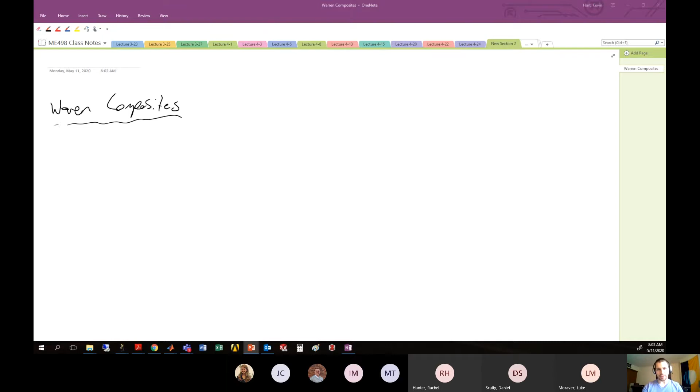I particularly like the first slide of the slide deck this go around - it's got some cool pictures and introduces the topic in a general sense. I'm going to pull one picture in here and talk about this quickly, to give a baseline for what I mean by woven composites. Most of what we've talked about in this class has been unidirectional composites. Woven composites are those where the fabric before impregnation is arranged in some pattern that's not a unidirectional pattern.

This picture tells a pretty good story about what would be a three-dimensionally woven composite system. This blue is a tow - thousands and thousands of individual fibers - woven in a wave fashion between straight warp and weft tows. So you've got some tows going this direction and some going this other direction. These are warp and weft tows, and we'll talk about that in a minute. So here's what I'd consider a fabric unit cell of a three-dimensionally woven fabric.

From this you can make a composite. If you're looking at it from the top without any load on it, you might see something like this - where now you start to see some of these things, like this blue Z-tow, the through-thickness tow. You can see it in the composite after manufacturing. This is a view from the top - you can see that Z-tow going over two of the tows running in the parallel direction. In this horizontal direction, you can see these Z-tows from above.

Now, what happens when you load something like that is some crazy stuff and crazy damage that might occur. For this reason, 3D woven composites are a little suspect, because they have this Z-tow which can really muck things up. If you end up loading this guy this way, you see all this cracking occur - it's just really horrible. We've talked about what happens when you load a unidirectional composite in the 90-degree orientation. That's kind of like what's happening here.

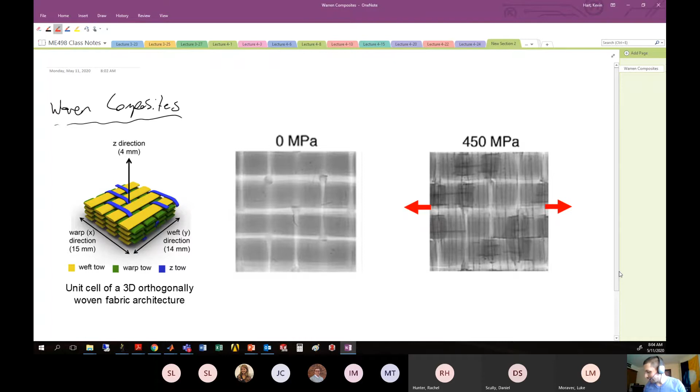And so you see all these cracks that form, and it's really nasty looking stuff. And you can also load it the other way and you'll get cracks that form the other way.

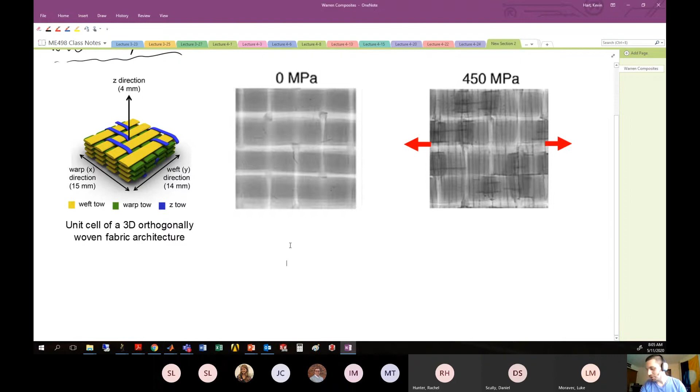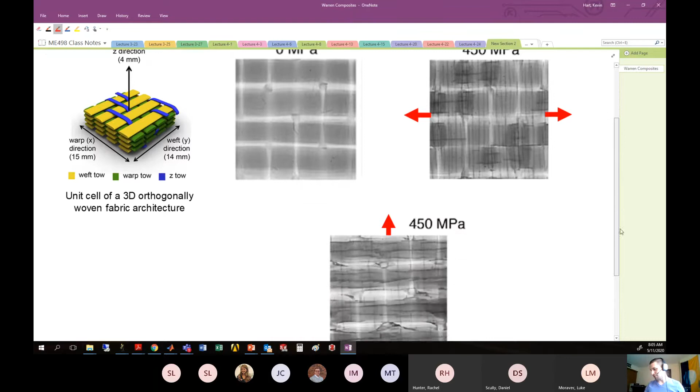So generally you can see that woven composites have very good fracture resistance because they have this through-thickness tow coming through, but their in-plane properties are not the best. This is what happens if we load the other direction, along the same direction as these Z tows, these woven through-thickness tows. Either way, you get some extreme damage, some crazy transverse cracking that causes ultimate failure, and some loss of in-plane properties with these woven structures, but generally you gain a lot of fracture toughness benefit.

Okay, so that's our little introduction. There are some nice cool pictures that I wanted to show. All right, so let's dive in and get a little more technical definition, and let's get our vocabulary going.

All right, so here we go with fabric architectures. I would say that woven composites are composites that are made from fabric architectures that were not one-dimensional. So let's talk quickly about these fabric architectures.

Fabric architectures are commonly categorized by dimensionality of fiber travel. So you'll see 1D, 2D, or 3D.

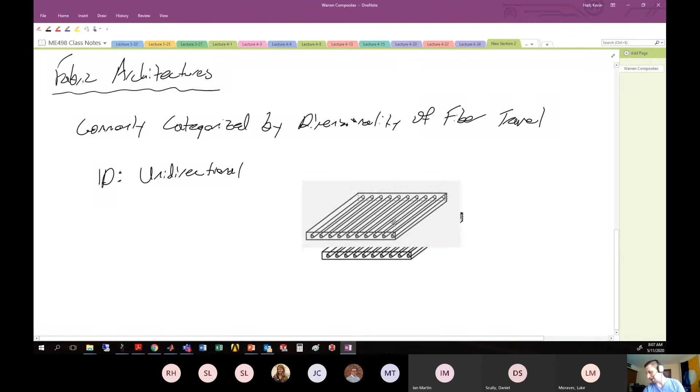Obviously, a 1D composite is made from unidirectional fabric, and this is basically what we've talked about the entire time in this class. It's how we construct laminated composites, and it's what our analysis has mostly been on. So here's your unidirectional composite, where you've got fibers all running just in one dimension. It's one dimension that these fibers travel in.

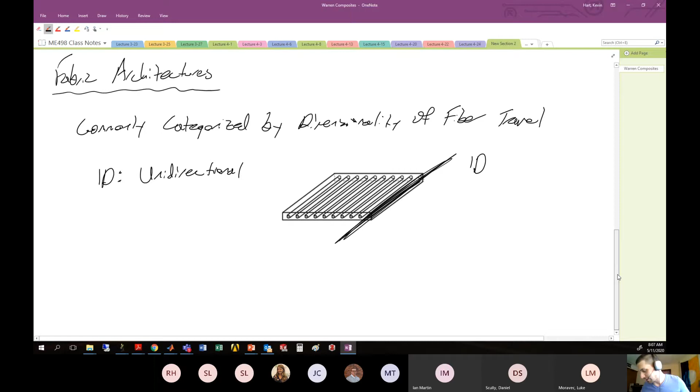If you make just a unidirectional composite, it would not be considered a woven composite, even if you stacked a bunch of unidirectional layers on top of each other, because it's not made with architectures that are higher than one-dimensional. So these are your 1D unidirectional architectures.

Your 2D architectures are those that have fibers moving in more than one direction, so usually it's like an in-plane fabric. And so some names that you might see here.

Looks like I have a question. Do I have a question? A plus plus plus plus. Okay, that's Justin. That must be in response to my meme. Or maybe he just really likes my pictures.

I don't know, unclear. All right, 2D composites. You are probably most familiar with a plain weave or a satin weave or a twill weave, which is a specific type of two-dimensional fabric, but there are other types.

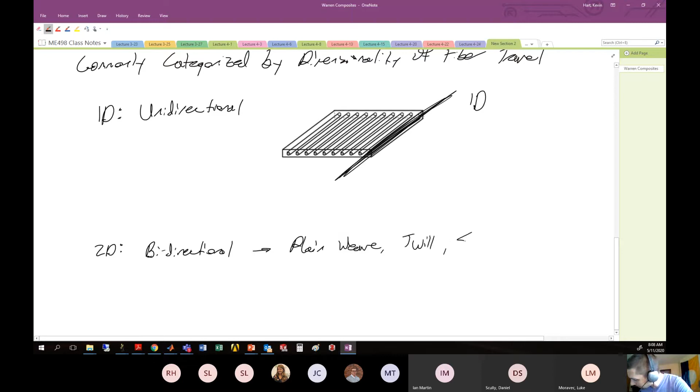So we would generally classify those types of weaves as bidirectional weaves, like your plain weave, twill weave, satin weave, etc. All right, so those bidirectional weaves are things that you've sort of seen in the past.

I introduced those in 429, and we talk about those in 429. I think I had you identify them on an exam. So those things you know.

There are other types of 2D fabrics, like knitted fabrics. Think of clothing manufacture. Like this clothing that I have, it was made in some way on some loom.

All right, so is this a plain weave? Is this a twill weave? Is this a knitted fabric? Is this a stitched fabric? Okay, these are the things that make up the backbones of what could be two-dimensional composites.

All right, knitted fabrics, there's braided fabrics, and you can also have continuous strand mats. Continuous strand mats are just where you have a bunch of fibers and you lay them down in a mat, and they're all randomly oriented in a plane.

Now let's get a picture in here and show what these guys look like. So most of these you have seen before, but maybe some of these you have not. So the pictures here will be helpful.

Pictures worth exactly 1,000 words. Exactly, I counted. Why did it go way down there? What the hell? Technology sometimes, you know.

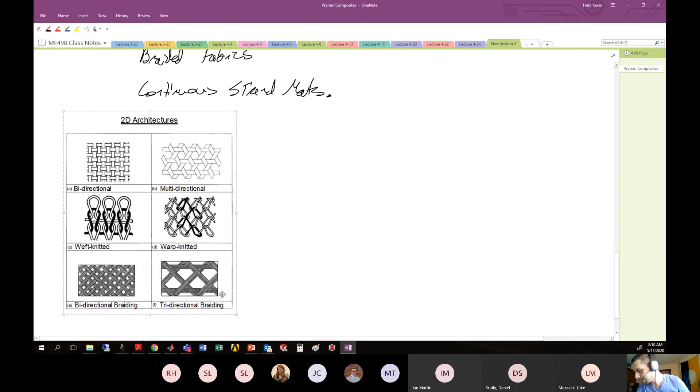Okay, so here are some of your 2D architectures. As I mentioned, there's this bi-directional weave, which looks like this. Here's an example of a plain weave bi-directional. You can have multi-directional, though this is very uncommon because it's actually difficult to manufacture something like that.

You can have weft knitted, so we'll talk about weft and warp in just a second. But this sort of knitting structure, what is it, stitch and purl. Anyone doing any knitting out there?

Stitch to purl too. So you can do weft knitted, warp knitted. Braiding we'll talk about is useful for making cylindrical structures, and you can have bidirectional or tridirectional braiding. These are probably equivalently difficult, or easy, to manufacture, however you look at it.

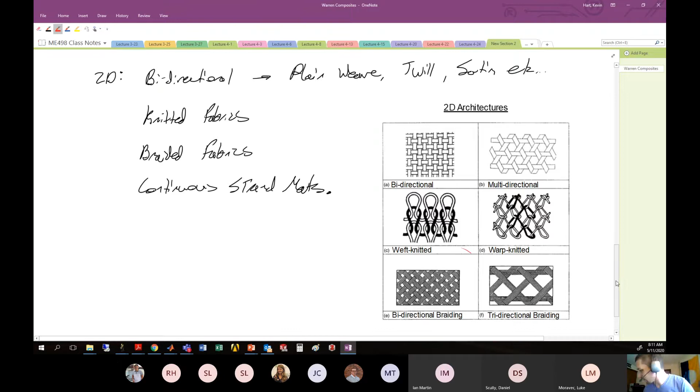So these are your types of two-dimensional fabrics, where the fibers are contained just in one plane. And then the next dimensionality up would be three-dimensional fabrics. 3D architectures can be made in a variety of different ways.

Back in the 70s, they were doing this Z-pinning and stitching that I mentioned before, and that's like a quasi-3D. So I put this here with quotation marks, but here I'll say stitched and pinned.

2D fabrics - I put this in quotation marks because if you just have a two-dimensional fabric and you put a bunch of stitches into it through the thickness dimension, is that really a 3D composite? You're kind of cheating. I guess you're incorporating fibers through the thickness, but it's not really part of the manufacturing process. So I don't like it much, but technically it is a three-dimensional woven structure because you do have a fiber going through the thickness. So technically yes, but it's like an asterisk. It's like it took steroids and it's trying to get into the Hall of Fame. It's cheating.

So stitched and pinned 2D fabrics, but much more on par would be like an orthogonal weave, or sometimes what's called a 3X weave. Those are very common types of three-dimensional woven structures. Let's take a look at what those might look like.

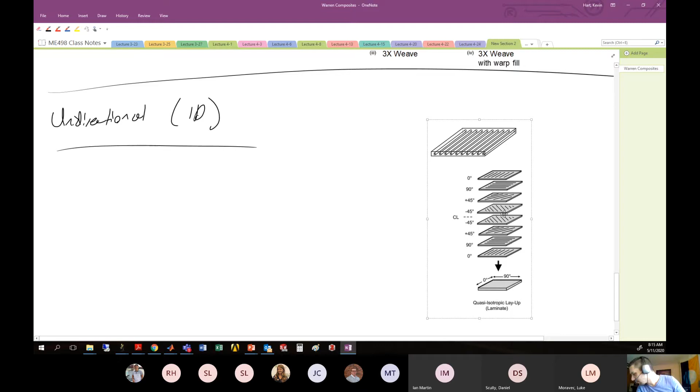Unidirectional, which is like 1D composites. So the general picture you should have in your head is, you want to make a laminate, you have one-dimensional composite, and the picture you should have in your head is something that looks like this, where you've got this unidirectional fabric, and it is feeding into these individual layers that make up what is like a laminate stack, and you can arrange them in a certain character so that you build them, build them, build them, to make the composite that you want. A cross section might look something like this after you've done this manufacture.

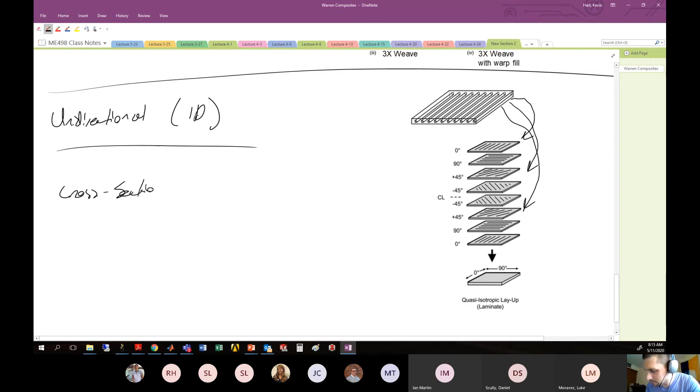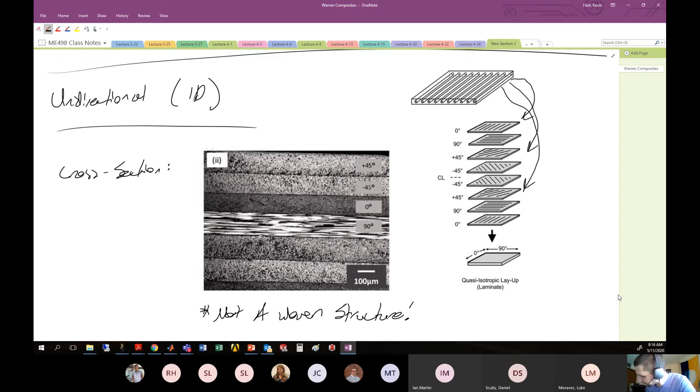This has voids in it, but don't mind the voids. The idea here is that you're stacking this up, and you have 0 degree, 45, minus 45, 90 degree layers, and you're making this laminate stack. Now, this is not a woven structure, because the layers are not interlocked with each other. So this is not a woven structure, and that's because there's no 2D interlocked architecture.

So there you go with unidirectional. We know that unidirectional materials are manufactured pretty straightforwardly. You get all these individual tows from a creel, they come together, and they're either going through solvent impregnation or the hot melt pre-pregging process, usually to make pre-preg. Otherwise, they can come in dry fabric, and the manufacturing there is pretty straightforward.

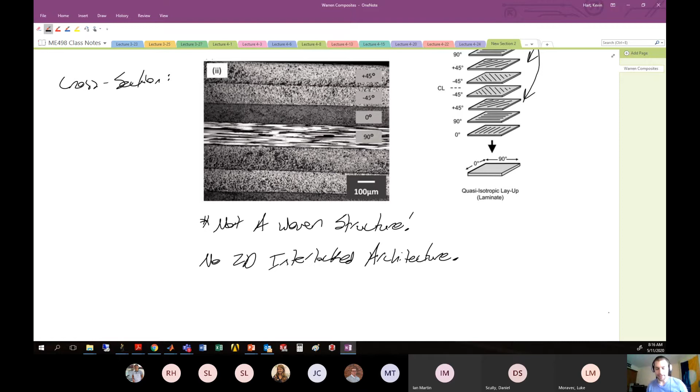I didn't feel the need to talk too much about the manufacturing here, but unidirectional fabric comes most often as pre-preg. So that's like 90% of the time it's coming as pre-preg. You can get unidirectional fabric in dry form, but it's not all that great, not all that common. You have to stack many layers on top of each other to get what you're trying to do. So most of the time, unidirectional fabrics are coming as pre-pregs.

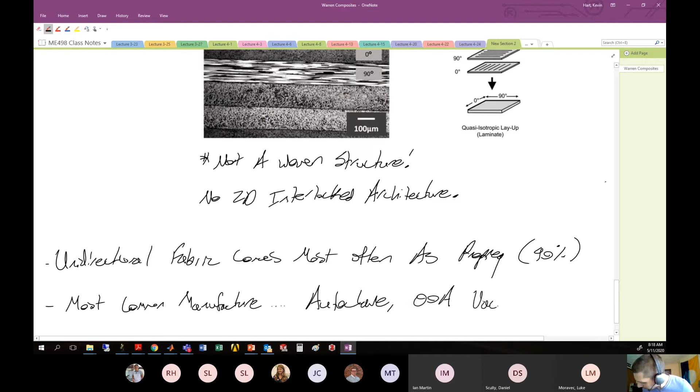And then the most common manufacturer of composites from those pre-pregs is autoclave, or out of autoclave vacuum bagging. There's that OOA again, I talked about that in 429. This is out of autoclave vacuum bagging. So if you don't have an autoclave, all you can do is put it inside of a bag and pull vacuum on it to do your best to try to squeeze everything down and get as much pressure as you can. So I'd say those are the most common manufacturing methods for the unidirectional or one directional fabric styles.

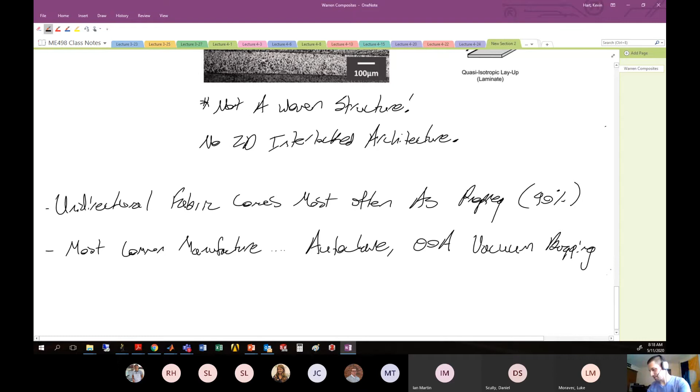I just want to bring in a data sheet here because let's look at what the data sheets actually look like for unidirectional composite, because we'll compare to 2D and 3D woven composites in just a second. So a data sheet - here, this is the same unidirectional material that I used when I created the laminate in day number 2, way back in February, I think that was.

God damn, that's a long time ago. Remember that way back when I made that composite? Yeah, this is the pre-preg that I used.

Okay, so a couple things I want to point out here. It tells you the amount of fibers in each tow - there's 12,000 fibers in each fabric tow. This is a carbon fiber pre-preg. Woven pattern here, we see non-woven, okay, because it's a unidirectional pattern, so that's of interest.

And here, this fabric areal weight - I've kind of alluded to this before, but I want to draw this out directly because I don't think I've made a very specific point about areal weight. The idea here is how much does one areal unit weigh? So if you've got a fabric that looks like this, and it's got 1 yard by 1 yard dimension, it has an area of 1 yard squared. So this fabric areal weight here is 4.3 ounces per square yard.

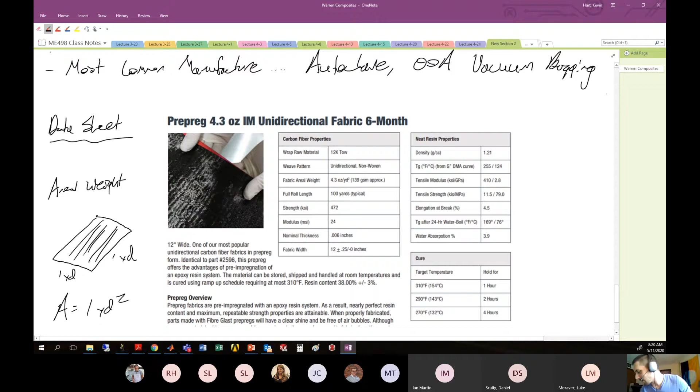Some other various pieces of information here - it tells you how to cure it. You get the idea, it's a data sheet. Tensile strength, tensile modulus, material properties - that's of the neat resin, by the way.

So there you go, that's all I'm going to say about one-dimensional fabrics. This is a lecture on 2D fabrics, so I'm trying to push through that 1D portion relatively quickly. We've talked a lot about one-dimensional fabrics, so how much do you really need to know? How much more can I possibly teach you? Well, there's a lot, but for now, let's move on from 1D and talk about 2D fabric architectures.

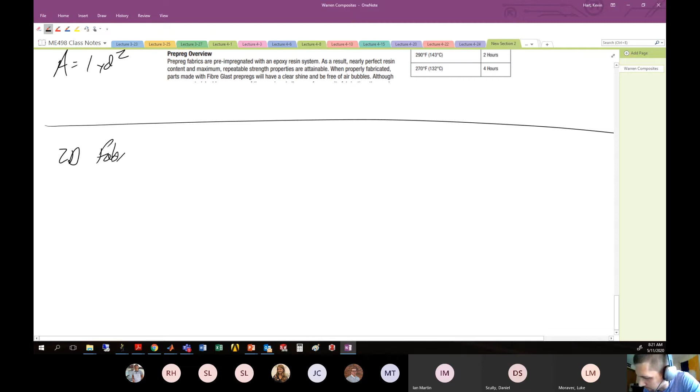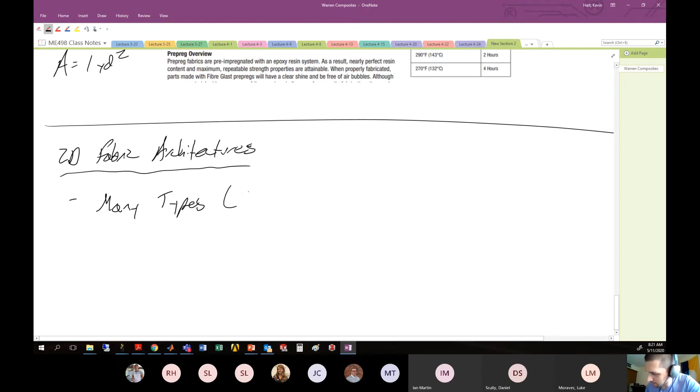And as I mentioned before, there are many types - there's the bi-directional weave, there's the knitted, there's stitched, etc. But bi-directional weave is by far the most common.

Gosh, spelling today. Like I say, it's bad today, but it's literally bad every day.

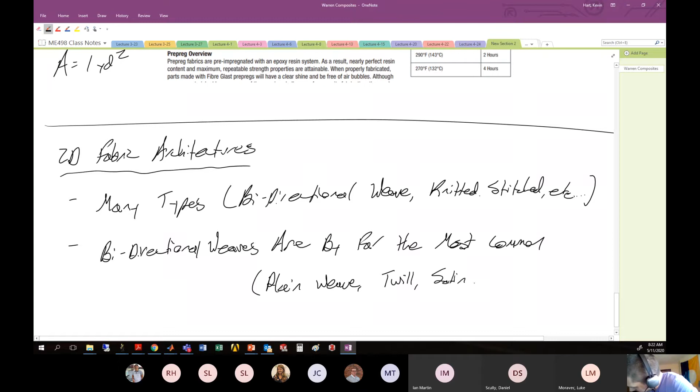Bi-directional weaves are by far the most common. Think things like plain weave, twill, satin, etc. These bi-directional weaves are by far the most common. If you're going to use a woven fabric in your life to manufacture something, 95% probability you'll be using one of these three types: plain weave, twill weave, or satin weave.

So let's take a minute, sitting right there, tell you how I became the Prince of Bel-Air. No, I'm just kidding. We're going to tell you how these bi-directional weaves are fabricated.

Let's make sure we have straight in our head what a two-dimensional fabric looks like, and what this bi-directional weave looks like. Here is a unit cell of a two-dimensional fabric. I showed the unit cell of a three-dimensional fabric, but here we need some nomenclature to make our way through the manufacturing process. Here's a plain weave fabric, two-dimensional unit cell.

What you see is this over, under behavior with alternating over, under. This plain weave is 1 over, 1 under, 1 over, 1 under. But now you see this nomenclature of weft and warp. Why do we use that terminology? What does that actually mean? Well, those two terms come from the actual manufacturing process of how this fabric was made.

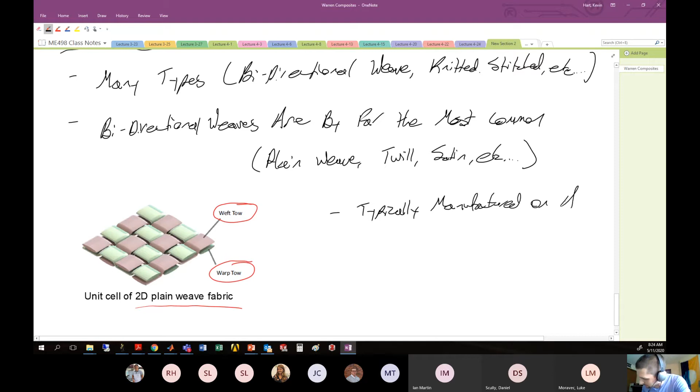These guys are typically manufactured on a loom, and by typically, I mean 99.999% of the time. Maybe you've got Grandma Hart stitching some 2D plain woven fabric in the background that's not on a loom, but, you know, very suspicious.

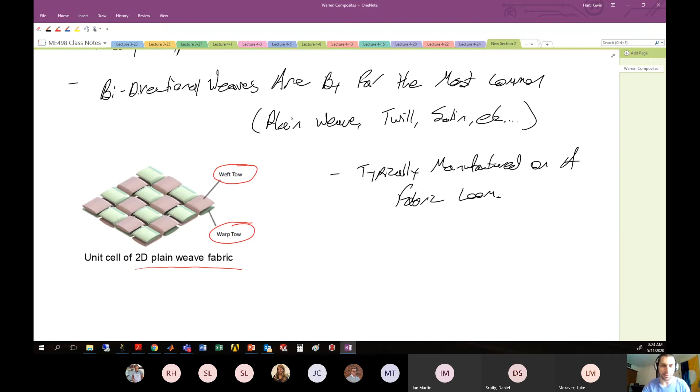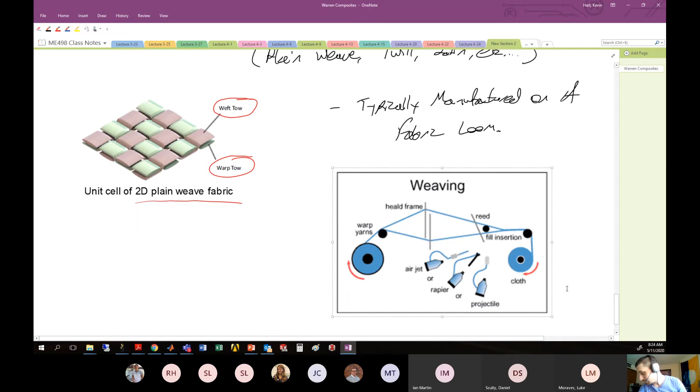Let's take a look at this weaving process and what it actually looks like. The manufacturing will look something like this. I'm going to show a YouTube video of this in a second, because I think the looms are an amazing feat of engineering. Very worthwhile to see a loom in action if you get a chance.

The idea here is that you have some mandrel with fibers, your individual fibers, and it's feeding into this loom. Many of these fibers are coming together, and they have this patterning where the fibers are coming into the machine and they're interlocked with each other. They're hooked up to what's called the heald frame, but I've heard it more often called the shute or the shed.

The idea is that these fibers are all moving into this shed and then being moved up and down. While it's being moved up and down in this fashion, another fabric tow is being pushed between this opening, shuttling back and forth. You see that opening being held by this shed.

What happens is it's opened in this various pattern and configuration, and inside of this opening a single thread is passed through, through one of three different methods: a projectile, a rapier, or an air jet. The most common is probably the rapier loom. Air jet looms are common as well, but you get the general idea.

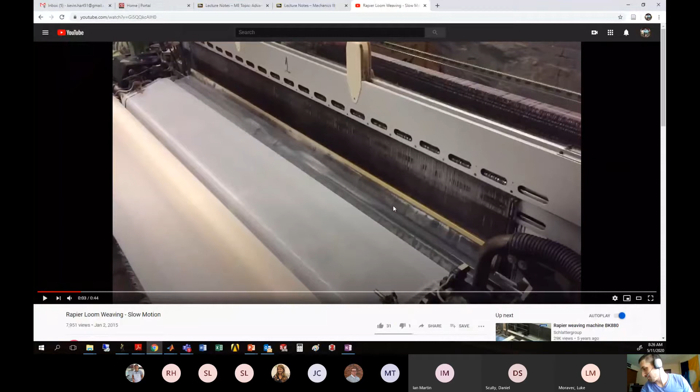Describing it is good, but I think a slow motion loom video is worthwhile here. So this is an awesome video, and I thought I would show it. This is a rapier loom in fabrication, making the fabric here. We see on the lower left the finished fabric coming off of the loom, and on the upper right, the shed.

It's going to do this thing where it moves up and down very quickly, and it will pass the fibers through. One thing I like about this video is it shows in slow motion the actual process of this weaving going on. You're not going to get sound with this.

I do have the link in the lecture notes if you want to actually hear the sound, but I'll give you the sound right now. That's the whole entire sound.

I'm going to play this for you and walk you through it. You can see the loom was just moving up and down very quickly, and now it's playing in slow motion. In slow motion, you can see the rapiers moving between the open layers of the fibers that are making up the backbone of the longitudinal direction.

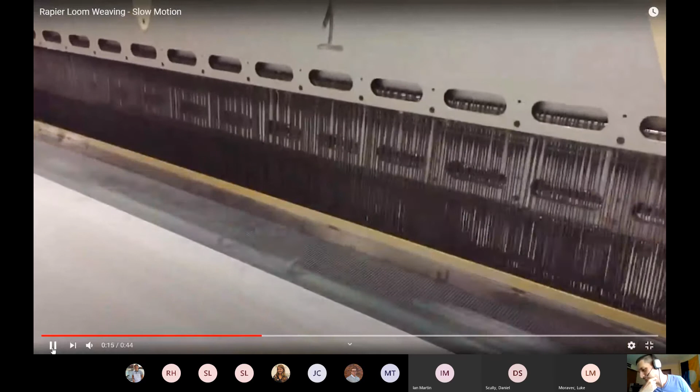All right, so again, there you see the rapiers coming in and moving the individual threads between the layers as they're sort of moving up and down. Now, what's going on here is each one of those black lines is connected to a fiber that's running in the longitudinal direction. So it's holding all these fibers, and it's causing this to shed up and down and pass the individual fibers between the opening and the shed as it goes in this up and down fashion.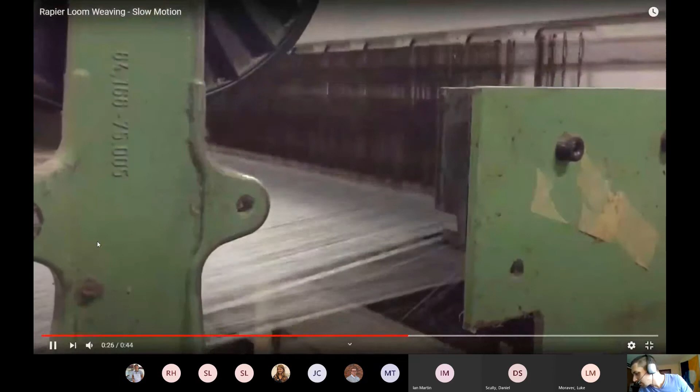Okay, so here we see the backside, and you see this triangular opening here where we're going to pass through that thread. You can see that the shed is opening all those individual layers, and that's where the rapier is passing through to pass those individual threads in the cross direction.

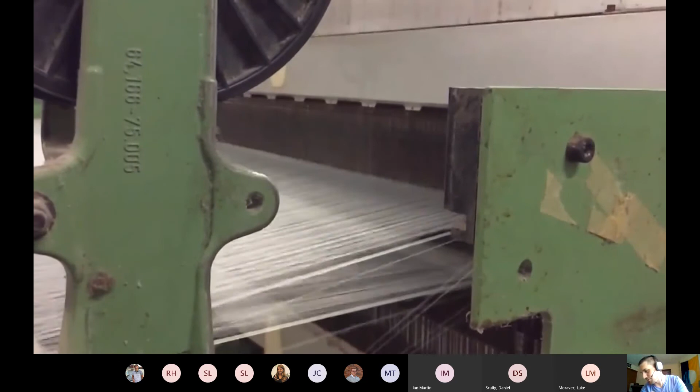So really awesome video, I like that video a lot. It shows you the rapier moving in slow motion, slowed down probably at least 10 times, maybe more like 20 or 30 times, to show the speed of that rapier. It is so fast - bang, bang, bang, bang, bang, bang, bang, bang, bang - passing those individual layers through.

Now, the reason I show this particular video is the fibers that are running in the direction that is being lifted constantly like this are called the warp fibers. That's like the 0 degree direction for the fabric. So here, continuous tows in the weaving process are the warp tows, and these are often called the 0 degree tows.

Now in a fabric architecture, a woven fabric, sometimes, like let's say you have a plain weave, it can be very difficult to identify what is the warp direction and what is the weft direction, because the warp and weft direction basically look the same in a plain weave. You have no idea which one is which. So you might have to have it specified, or if you have a roll of the fabric, you know that if you're unrolling it, which direction is warp and which direction is 90 degrees to that, which we call the weft direction.

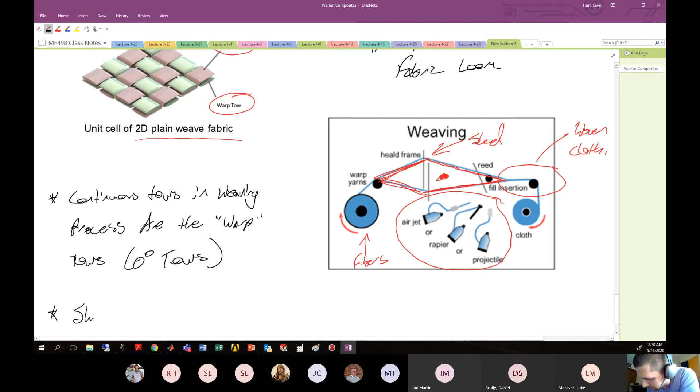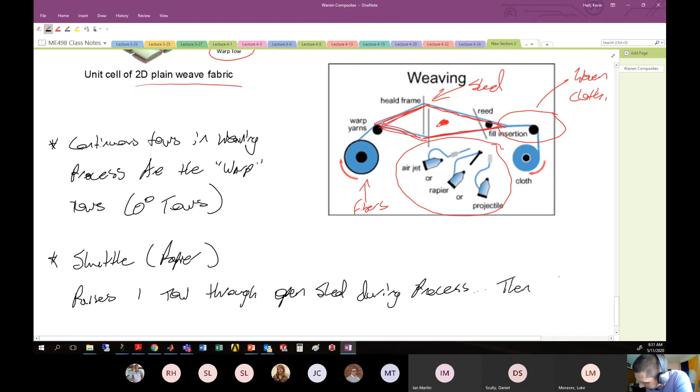Okay, so the shuttle, or the rapier, passes one tow through the open shed during the process, then repeats. That pass-through tow is the weft tow, or what is called the 90-degree direction.

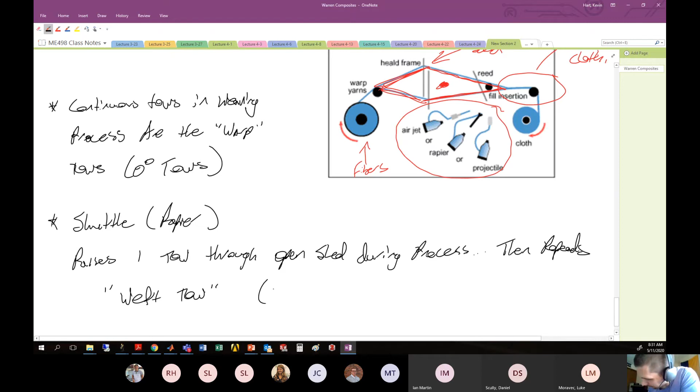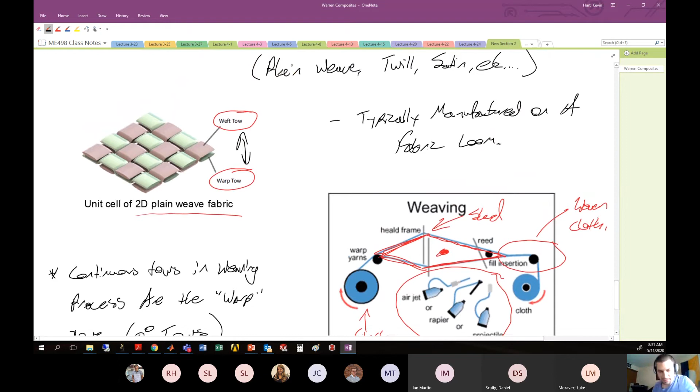Okay, so that's kind of how your loom works. So when you see this unit cell and people are talking about warp and weft tows, or warp and weft directions, that's what they're referring to - the way the fabric was manufactured on the loom, and which fibers were in the warp direction, which is this continuous direction, and which ones were passed through the rapier, which is the weft direction.

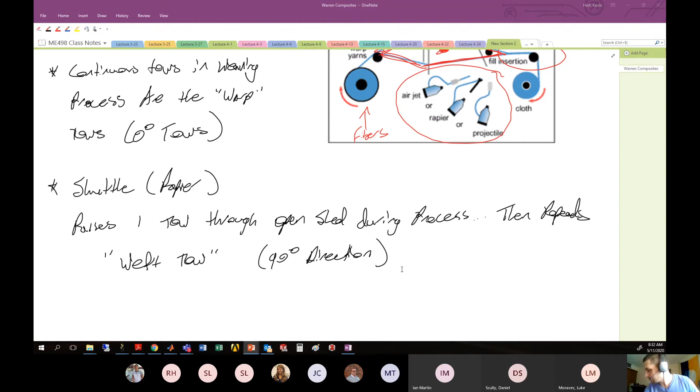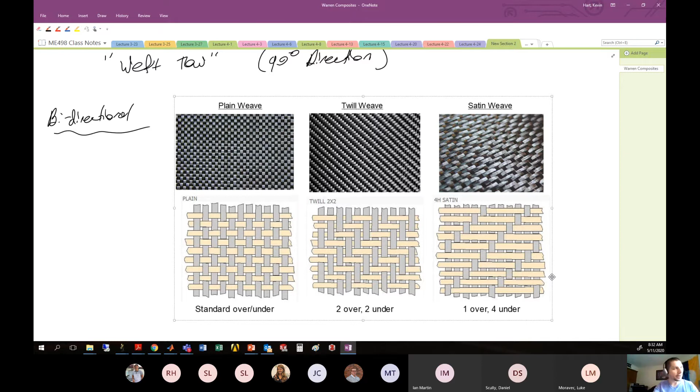So here's your plain weave, your twill weave, and your satin weave, just to remind you. Plain weaves are standard over-under. Twill weave, you have like 2 over 2 under, or you could have 4 over 4 under, or some variant of that. And then your satin weave is something like 1 over 4 under, 1 over 4 under. And they all have various benefits and drawbacks, which we've talked about in 429.

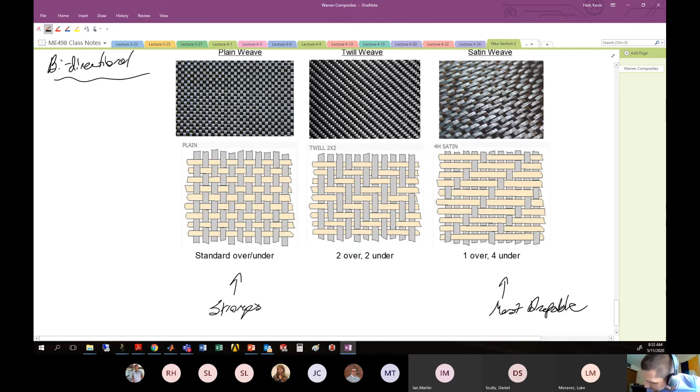Like this guy is most drapable, and this guy is strongest. So twill weave is kind of the happy Goldilocks medium right in the middle. All right, so that's the general idea.

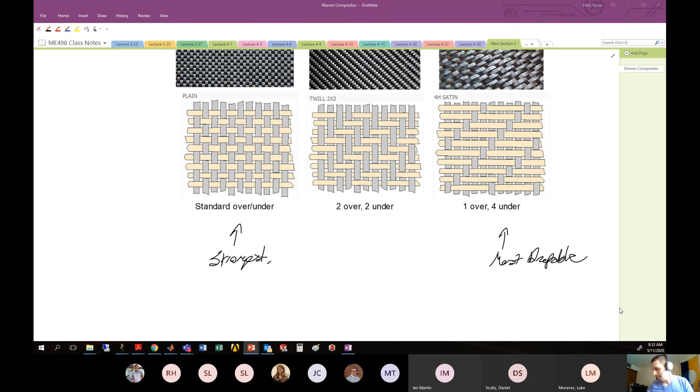Now, I showed a data sheet for the unidirectional fabric. I also want to show a data sheet for a woven fabric as well. And the data sheet is helpful here because it shows us some additional information that most people actually don't know. So let's take a look at this data sheet, and this is for a 2D dry glass fiber plain weave.

This is generally a pretty thin plain weave. Probably not quite as thin as you can get, but pretty close.

What you'll notice here is they tell you which yarns or tows they use in which direction. Both the warp and the fill, sometimes called the weft, are listed. They're telling you which yarn specifically they're using in each direction during the weaving process. The warp is the continuous layer in the loom, and the fill or weft is what's being passed through the rapier. So those are the glass fabrics or yarns being passed through in that particular direction, and you see they're the same fiber in both directions of this particular plain weave.

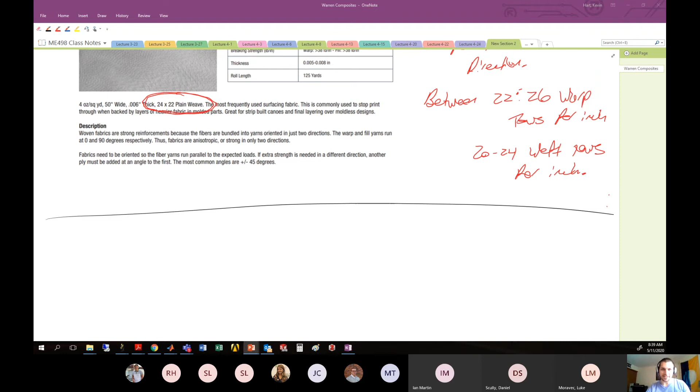All right, so let us continue a little bit here. That is for a dry fabric — here's your data sheet for generally a dry fabric. Woven materials can also come as prepregs.

Though not as common, I'd say maybe it's about a 50-50 split, or leaning slightly towards getting the fabric in dry orientation. So approximately 50-50 wet and dry use, probably leaning a little bit more towards dry use, but that's an approximate idea.

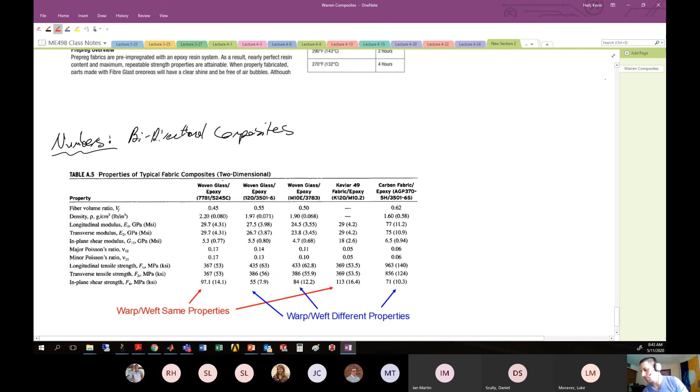Bi-directional composites - properties of typical fabric composites. These are composites made from this two-dimensional fabric I mentioned. Here's a woven glass epoxy. They didn't tell us how it was woven - just that it's a woven glass and epoxy composite. Maybe it's a plain weave, maybe a twill weave, maybe a satin weave, maybe knitted - who knows?

So here we see in the 1 and the 2 direction, which would be like the warp and the weft direction, we have the same elastic modulus. This tells you that this particular weave was made in a symmetric fashion - it has the same number of warp fibers as weft fibers, made out of the same material. So generally this has the same material properties in the 0 and 90 direction for this particular woven fabric.

That is different from this guy next door. You can see the elastic modulus here is not the same in the warp and weft direction, in the 1 or the 2 direction. Usually 1 is associated with warp and 2 with weft. So we don't have the same general properties in the warp and weft direction here. The warp is slightly stiffer in this case than the weft.

And you see that in other things here as well, like - what is the Poisson's ratio in the two different directions? Not the same, right? So there's a couple here that generally don't have the same material properties. All three of these don't have the same material properties in the 0 and 90 degree directions - different properties in warp and weft - as opposed to these guys, which do have the same properties in warp and weft.

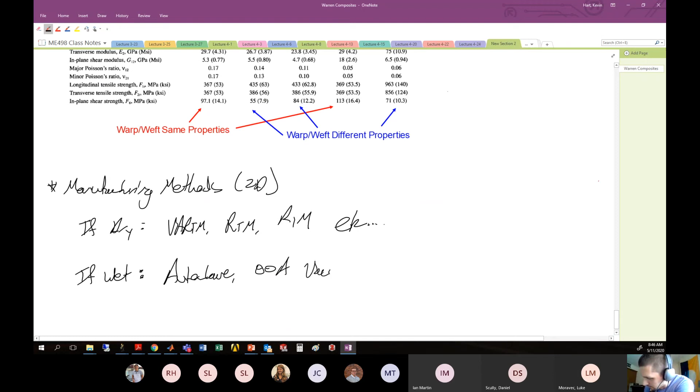Your typical dry techniques: you lay your dry fabric inside of a mold, then close the mold and inject the resin, or pull the resin in with vacuum, and so on. Remember VARTM, vacuum assisted resin transfer molding, RTM, resin transfer molding, RIM, resin injection molding. Remember, they also come as pre-preg, so wet, in pre-preg form or approximate pre-preg form, autoclave, out of autoclave, vacuum bag. Those are the most common if it comes in pre-preg form. Because 2D fabrics can come both dry and wet, all of the manufacturing processes of interest to us would probably be possible. Sometimes you'll see it as dry, sometimes as wet, sometimes as pre-preg, etc.

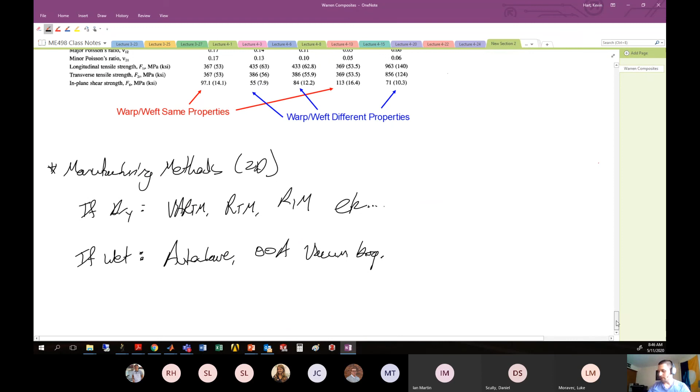So far we've really just talked about the bidirectional 2D fabrics. I want to do one last thing on other 2D styles - we kind of passed over stitched, knitted, and braided. Let's quickly talk about these other 2D styles. These are not nearly as common: braided, knitted, not nearly as common as bidirectional weaves. Though I will say that some braided structures are good for making cylindrical composites.

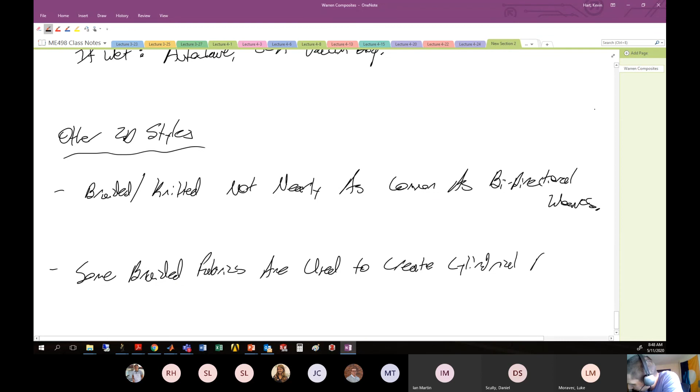Knitted, you almost never see. Braided at least has some use - some braided fabrics are used to create cylindrical parts, like rocket casings, fishing poles, etc. Let's take a look at what this braided fabric might look like.

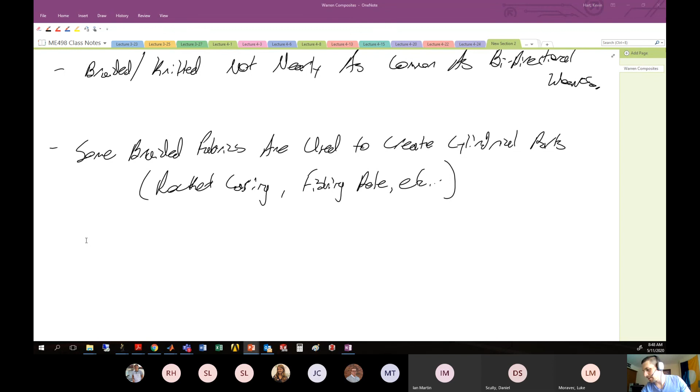It's too bad that we don't have in-person meetings, because I actually have all of these fabrics that I could have passed around. One particularly nice example I have is a dry braided fabric and then a composite that has been made from that particular fabric. So I have physical examples of these two things that I could have passed around in hand, but such is the way of the world, the current situation.

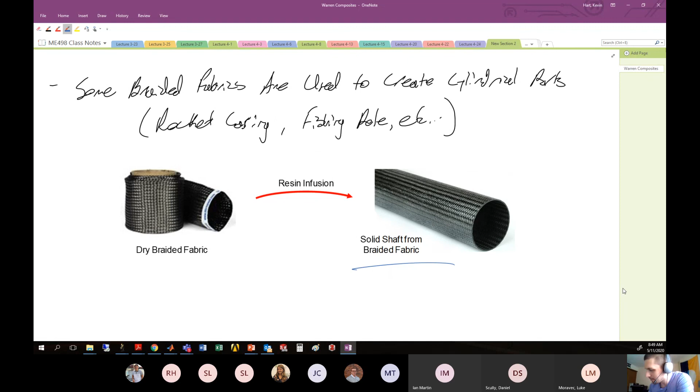Here's your dry fabric, and they call it a 2D composite because you can see it's wound up on this bobbin here, and it has this 2D pattern. Before this opening here was there, it kind of laid flat as a two-dimensional fabric. So you prop this thing open, you slide it on some mandrel or something, and then you infuse it with resin, and it becomes this sort of solid shaft from that particular braided fabric. So this exact fabric was used to make this exact shaft here on the right hand side, and that's a common use for these braided composites, is making these shafts.

I think, Will, that lacrosse stick that you had, I actually don't think it was made from a braided shaft, but similar cheaper lacrosse sticks have probably been made with braided fabrics that look something like this.